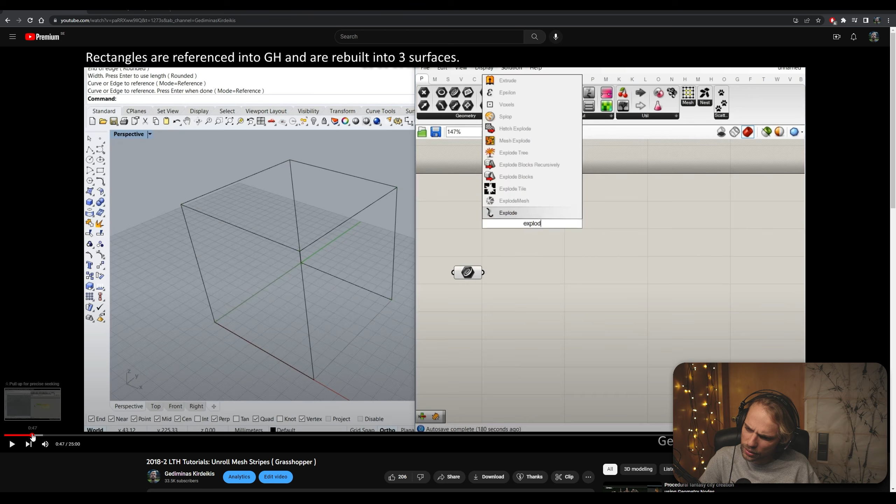Hello, and welcome to a renewal, or refurbishment, video of a tutorial that I made 4 years ago. Back then I made this Grasshopper tutorial, Unroll Mesh Stripes tutorial, where I went through the workflow of how you can turn any shape into a series of mesh stripes, and also how to make them laser cuttable.

This tutorial didn't have any sound, and at this point it's very old. So I want to give it a new life, because during the last 4 years new techniques have emerged and new ways of making these mesh stripes have been developed. So that's exactly what we're going to be doing.

Searching the internet, I found a forum thread where Daniel Piker, amongst other people, discussed how we can make mesh stripes a little bit more effective. Daniel introduced two approaches, and I'm going to be showcasing one of these approaches to you: the multi-pipe stripes approach.

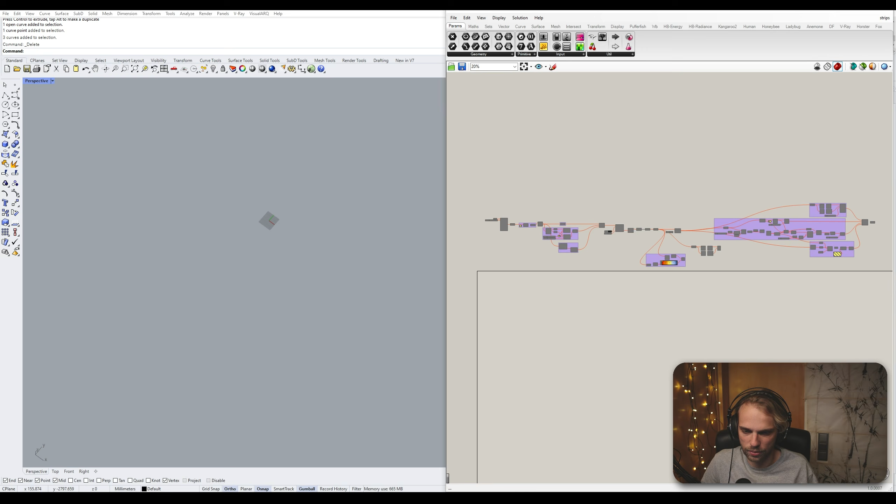This is what we're going to be doing. This is the cleanest approach that I've seen so far for this kind of stripe unfolding of any mesh, so I'm pretty happy with it. With that being said, we can jump right into Rhino and start working on this.

So this script that I have right here is just my notes, and basically I will just be looking at those notes if I get stuck.

First thing to do is to set up some sort of starting condition in our Rhino file. So I'm going to do something very simple: I'll just draw a single line segment that's 1,000 millimeters long, 1 meter, about 3 feet long, and then array polar it.

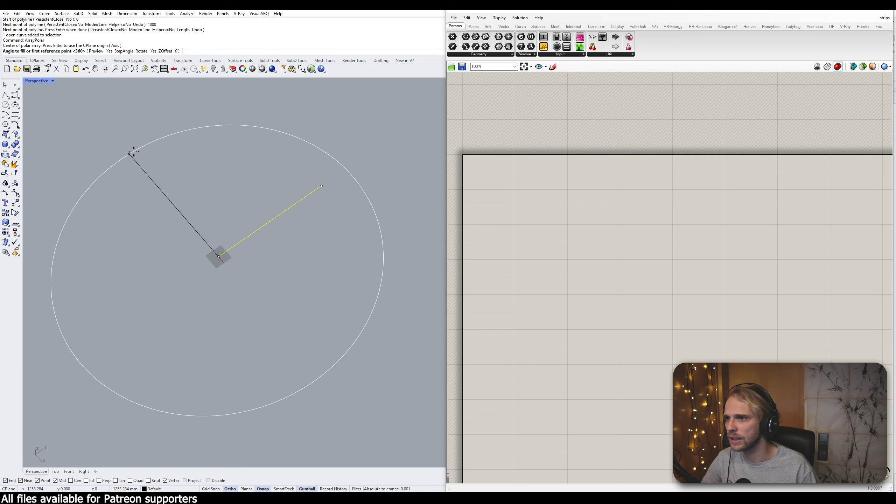I'll array it around the center point, this point right here. Number of items: 3, that's perfect. Angle to fill: 360 degrees, great. So we end up with these 3 lines here. For my kind of experiments, I think this is going to be good enough for now.

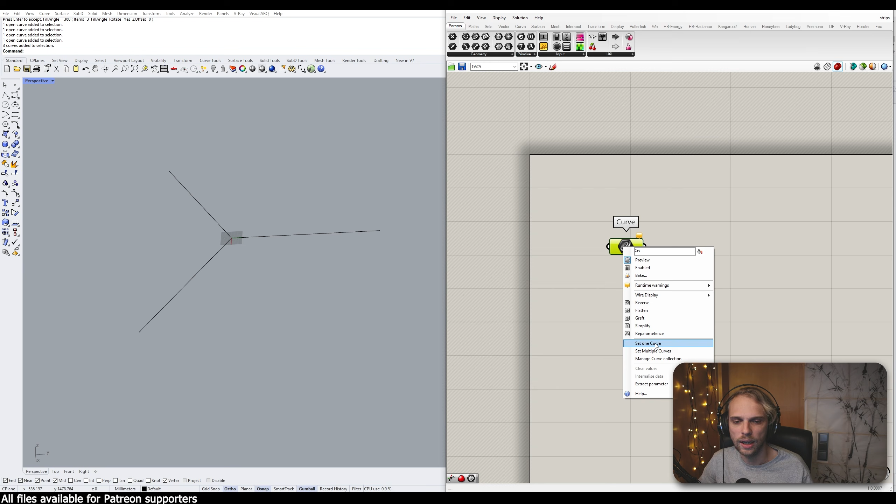Just having this, and then we can build up in complexity as we go. So I will reference these curves into Grasshopper, and let's do a quick bifocals thing—you don't need the bifocals, I do—just for me to show you the names of the components. Set multiple curves, we select all 3 of them, and now they are linked.

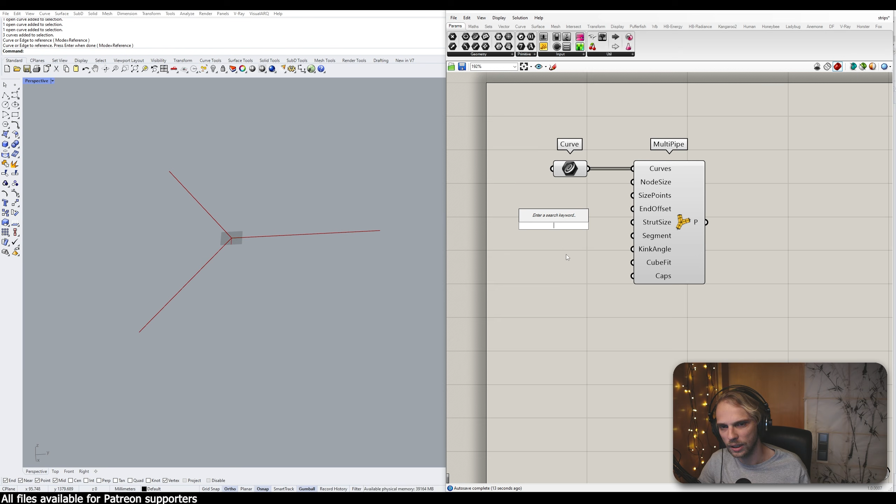Next step, we need to do a multi-pipe right here. The multi-pipe component will basically create sub-D pipes around the 3 lines that we have. Of course, we need to change the node size to something a little bit more reasonable. Let's go for, if this is a meter, 250 millimeters node size. Yeah, something like that seems fine.

And you can see how clean multi-pipe actually is. Honestly, I'm so impressed with how well multi-pipe works. With this done, we can extract a mesh from multi-pipe.

For that, I will go to Surface, Utilities—nope, Sub-D, Control Polygon, there we go. Select that, place it, extract. So it gives us... let's hide everything else here. It gives us a mesh representation of that sub-D cage that we created with multi-pipe.

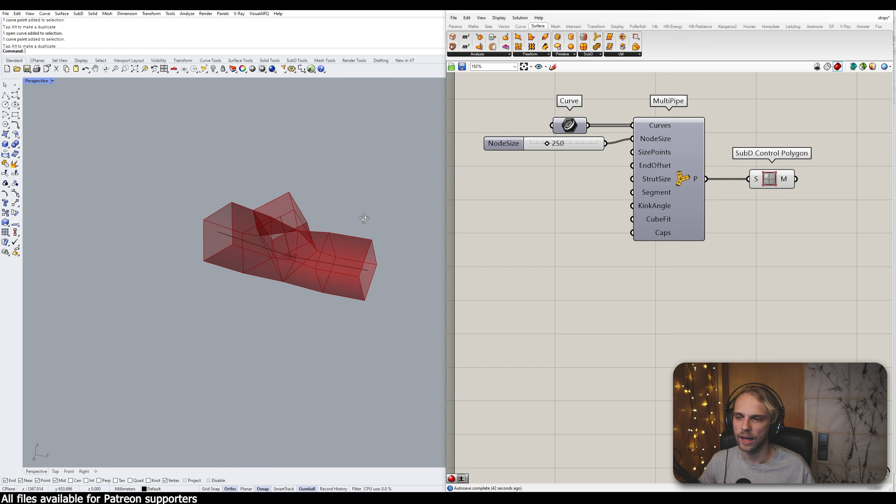Right, so we're kind of here. This mesh cage—if I were to take, let's say, one of the curves, one of the endpoints of the curves, and move it up, you can see that the mesh cage actually follows that and adjusts to it. I feel like this is quite interesting and quite important to see.

Okay, after this is done—so I've just lifted one point by some amount upwards—once this is done, we need to introduce more resolution to this. So we will use Refine, which divides each quad into 4 quads and each triangle into 4 triangles. Let's take a look.

That's still not enough polygons, so I'll refine it with level 2. To quickly get a panel saying 2, you can just write 2 and use a slider. Both are fine. So we connect it, and we have it refined.

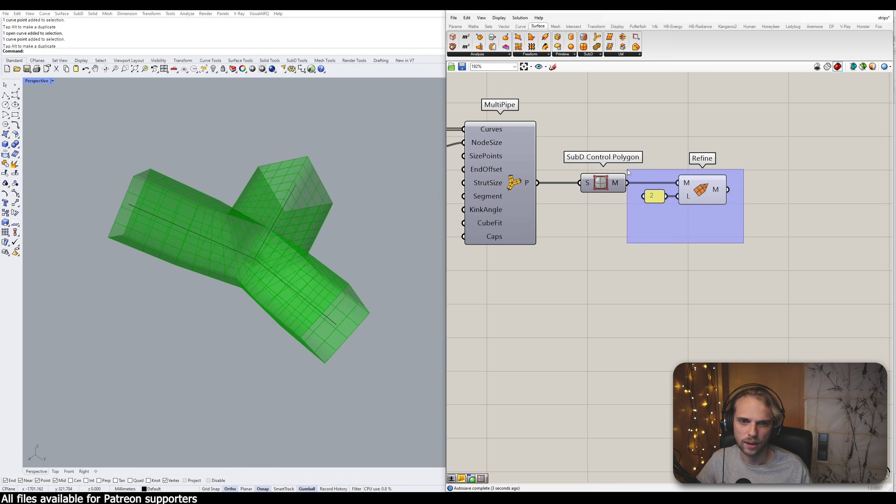We have it refined, and if I remember correctly, there was also cleanup. Just to be sure that everything is fine, that there are no double points or anything like that, I will use combine and clean component right here. So these two parts are basically introducing more resolution and cleaning up the resolution.

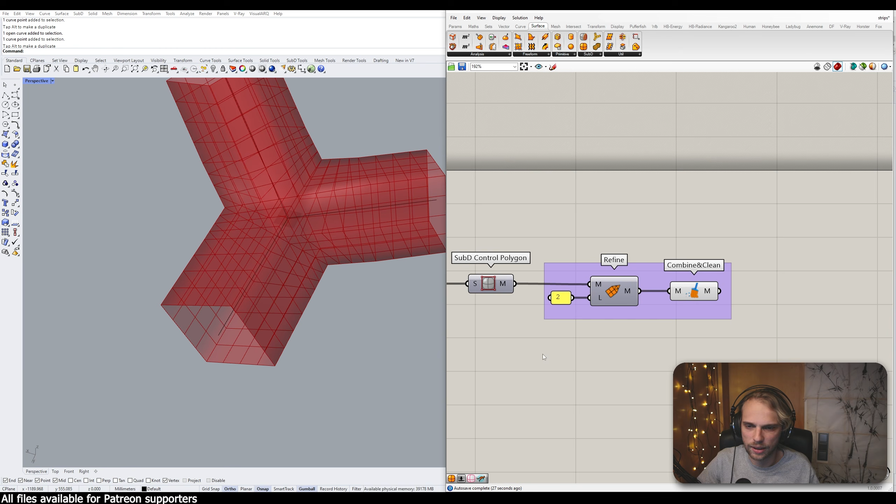Then what we will do is we will actually introduce even more. Now when I think about it, give me a second. Let's change things up. So what if we, instead of refining... I always do this and always regret it.

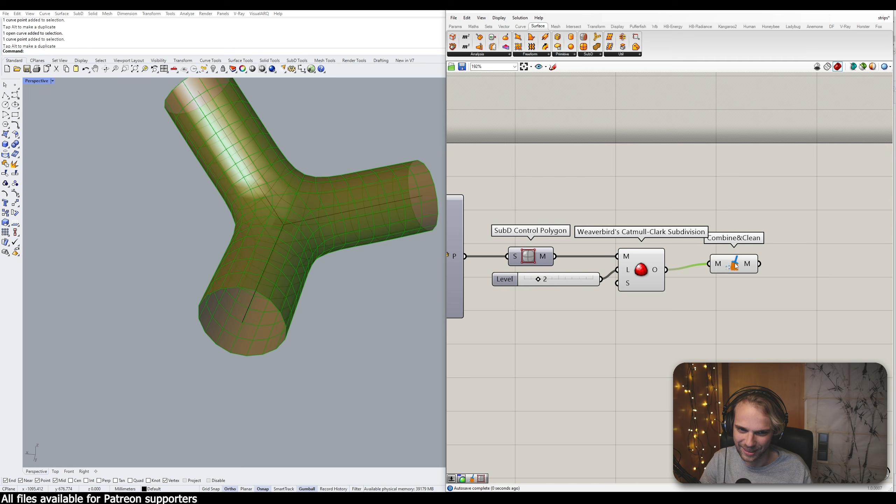Okay, instead of refining, we can use Catmull-Clark subdivision, with level 3, or sorry, level 2. Actually, let's do level 3, or let's do level 2. I keep changing my mind, I know, I'm sorry. Level 2, Catmull-Clark subdivision, and we use combine and clean. So instead of refine, we're using Catmull-Clark. And then we get a mesh out of this.

So mesh, like that. Let me make myself just slightly smaller so that I don't accidentally intersect with the nodes that I'm trying to display. So we have mesh. Next up, we will start building up this solver situation right here.

With kangaroo solver, I always like to basically just relax this mesh. With kangaroo solver, I always like to, what's the word, I always like to work backwards.

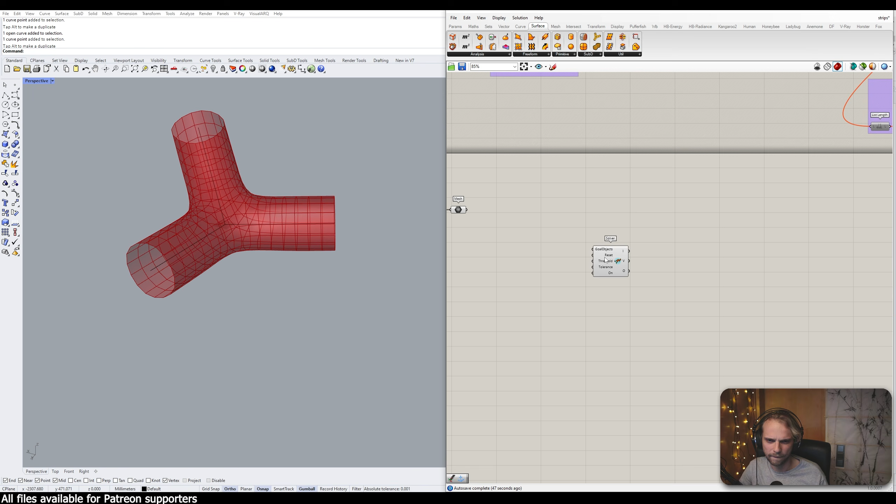So I'll use solver. And then solver requires goal objects, reset and on. Reset is a button, always, to be able to reset you need to press the button. On is a toggle, always. To have the simulation turned on, you need this to be double click, true. To have it turned off, false.

Goal objects, I always use entwine because it gives me the cleanest input. Stuff arrives in different data branches. Then after the entwine has done its thing, it's going to be spit out here also as a data tree. So we will want to separate out the data tree with a bang. Or you can use explode tree, it's the same thing.

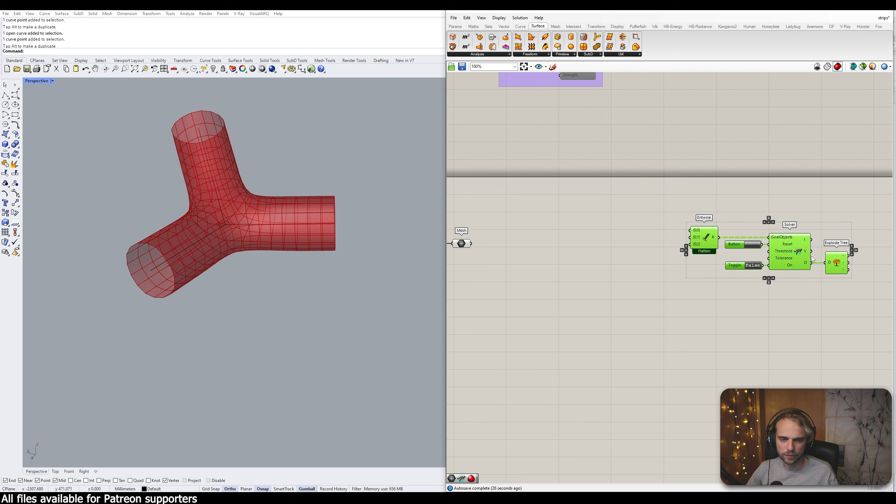Like that. Notice how I zoomed in and added one more input or output. So I zoom in and press the plus sign right here, and it gives me now 3 outputs. That's because entwine has 3 inputs. I need the inputs and outputs here to match up, or else explode tree is going to complain a little bit. Okay, so in terms of the goals that I want to have, there are 3.

Goal number 1 is show the geometry. This mesh needs to be shown, as easy as that. That's my goal number 1.

Goal number 2 is I want to introduce warp and weft, like this portion right here. I want to introduce contraction of edges, of mesh edges, along the warp direction, which is along, and weft direction, which is across. So warp, weft, like that. Mesh goes in here.

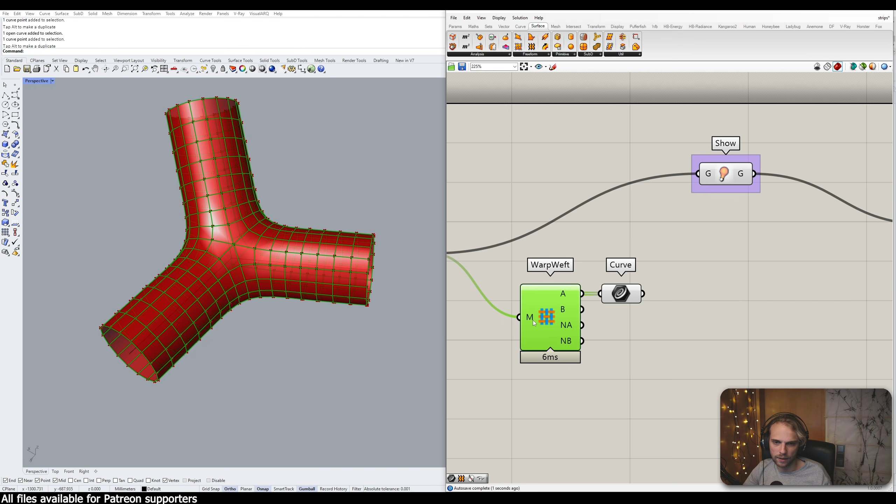And you can see 2 types of curves are being spit out. Let me show you those. Curve. You can see as I have them selected, this is all of the lines of the mesh in the warp direction and all of the lines of the mesh in weft direction. Does that make sense? There are 2 possible directions for the mesh. For a quad mesh, by the way, it needs to be quad to work.

All right, so with this done, then I will specify what's the new line length that I want for the curves in both directions. Line length, or length line, for A and also for B curves, like that. The length for both of them should be 0.

Great, but the strength should be different. So I want them to contract, but I want them to contract with different power or different strength. I don't remember how much, but let's just try. Let's just start with 0.5 for the warp and 0.25 for weft, and we will adjust accordingly.

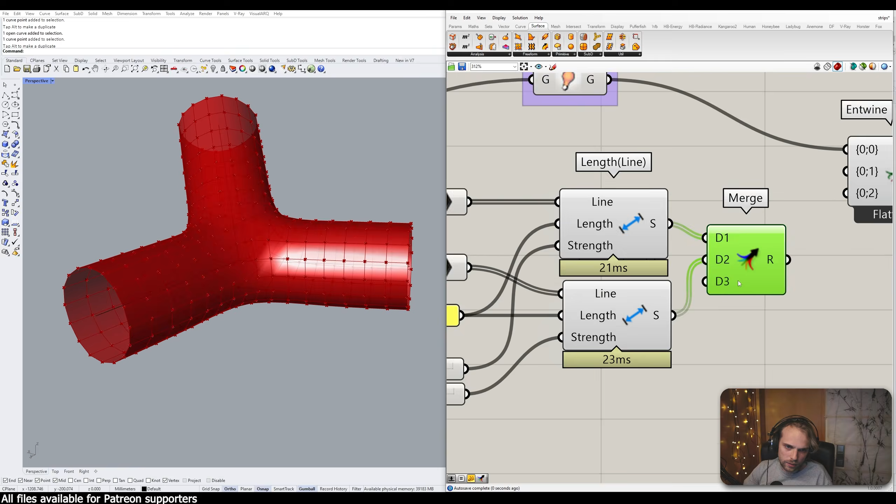So these 2 sliders will be a thing that we will keep an eye out for. We merge the 2 together. There we go, perfect. And we connect them to our Entwine 01 input. So this is our goal number 2, basically saying that some lines should be contracted. In one direction, lines should be contracted more heavily. In another direction, the lines should be contracted less heavily.

All right, let me hide that. Hide that.

What's next? We can also hide the mesh, right here, because it's being spit out here as well as here. There are many places where it's being output. Let's do this: explode tree 00 output, since show is our 00 input. This is where the mesh is being spit out, so let me create a mesh component and connect it like so.

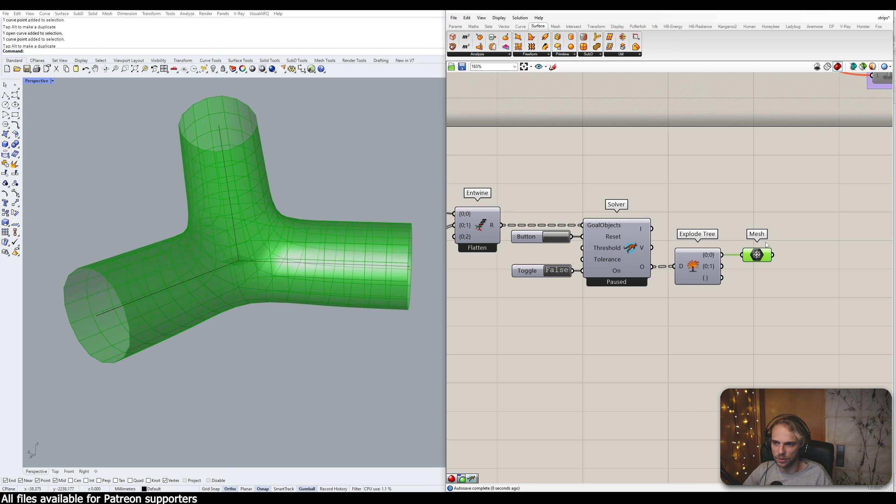Perfect. Now we can hide literally everything, and only the mesh component is going to be displayed. All right, last thing: right now, if I let everything contract, I can run this. You can see it just contracts to one point. Well, that ain't gonna do it.

So we need to lock it down. I'm going to lock down the mesh along its naked points, naked vertices, mesh - there we go. All of the naked points are here, and I'll just say anchor, anchor them in place. That is going to be our Entwine, the third Entwine input right here.

That's it, that's as easy as it is. All of the naked points are literally just the... I can show you, like that. They're around the openings, right? So they're right here. Okay, so we have ourselves a mesh.

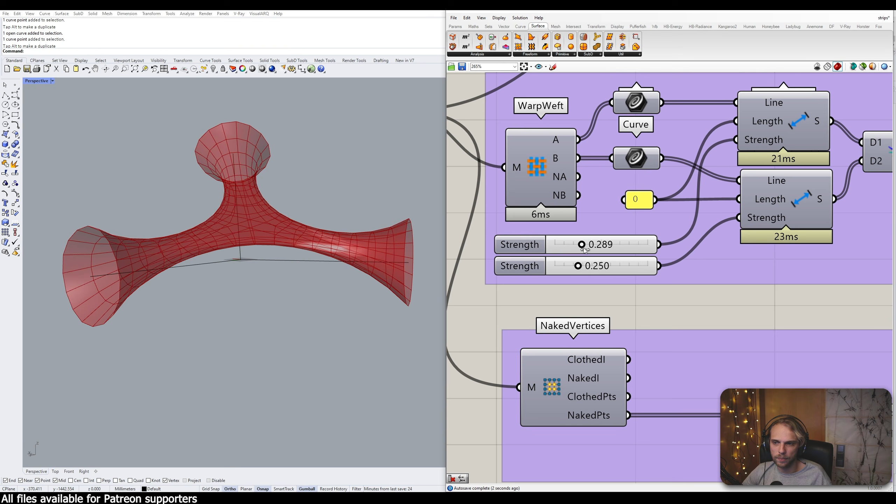Now if I reset and run this, you can see that this works exactly as what we would expect it to, how we would expect it to work. And now as I play around with warp and weft, I can fine tune this to give me a

pretty nice shape. After I'm happy with this, I will take a look and decide if I want this to be even denser in terms of the polygons. If I want to, I can do Catmull Clark again on the mesh, and it becomes even softer.

Keep in mind that this will simply increase the amount of polygons drastically, which in turn will increase the amount of connection points that you will have. So for now, I will not use the Catmull Clark on this. I will look at the mesh as it is, like a naked mesh.

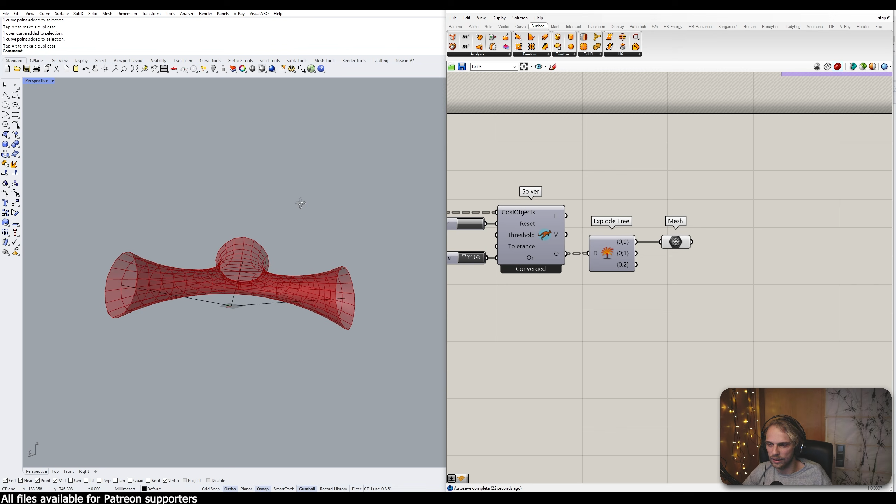Let's play around with the curves now. I feel like it's time. So I'm just going to create a curve right here. Let's see, this is a triangle, and then there is, come on, some sort of a line drawn.

Okay, my apologies, let's continue. I had to stop because I didn't want to continue with a form that we don't have full control over. And I figured out that, well, if the problem is how much it contracts or how little, then we do need to be able to control the length better, right?

So I have deleted that panel saying 0, and instead we're going to be using something a little bit more nuanced. I'm going to be using a multiplication rather, and I'll ask for, okay, what's the length of this curve, for instance, of each of these curves - what's the length? Okay, I get the length and I multiply it by 0.9, let's say.

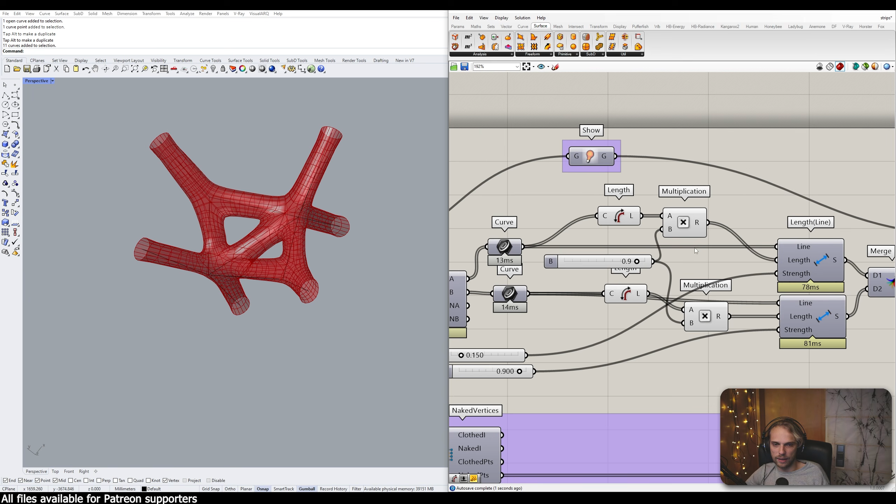And I can do exactly the same thing in the bottom here. So I'll just say length, multiplication, and I'll use the same slider for both. Like that - when I'm doing this, now I am able to fully control how much the form is expanding and contracting, which is great, right?

So now back in here, I can go back and change the node size to something a little bit thicker, a little bit bigger, perhaps something like that. Let's just see - and that seems about right. Okay.

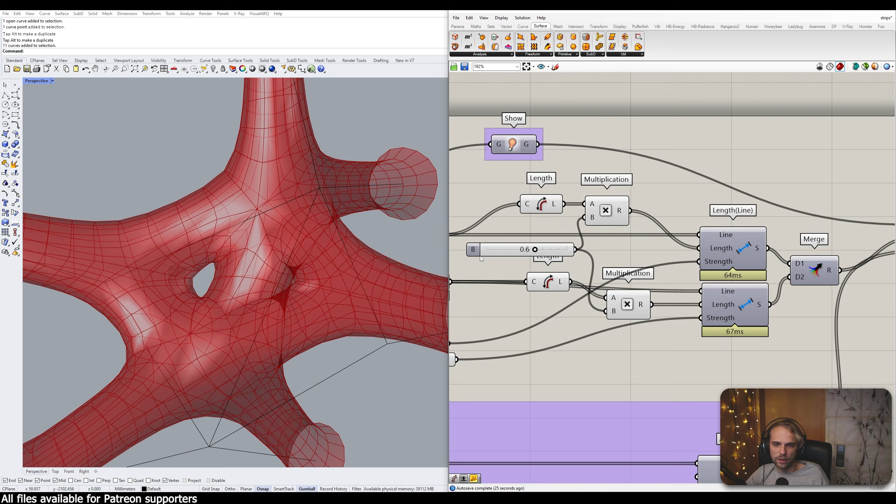And then if I reset, I get this kind of an output, and I can work on it with the slider. Right? So I can make it contract more or less, depends on what I'm trying to achieve. But let's stop it right here and let's just continue working on our definition.

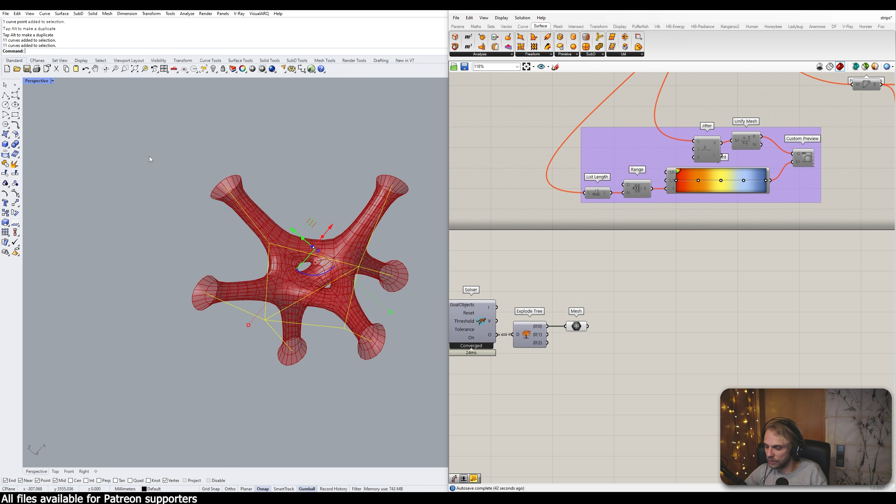So now with this done, or rather this done, as we move forward, we get ourselves a mesh. So this mesh right here, we're basically somewhere around here. And this mesh right here needs to be divided into stripes, and this is where our favorite little tool - let me hide the curves by the way.

This is where our favorite little tool called stripper comes in. So if I use a tool, stripper, and I just connect mesh to stripper, you can see that visually nothing really changes.

But then if I were to do this to it, color it basically, use custom preview with a gradient, and right click on the gradient to choose amongst presets a color range. Let's say this. Oop, messed it up, doesn't matter.

So color range. Then if I were to ask how many strips did it make, list item, basically, oh sorry, not list item, list length. Ask for list length, there we go.

And I say that, okay, my range is going to be between 0 and 1, and with list length, I will specify amount of steps in between 0 and 1 to kind of fetch the colors from here. So I'll use range for that, like so. Range connects to T. Now we have our colors.

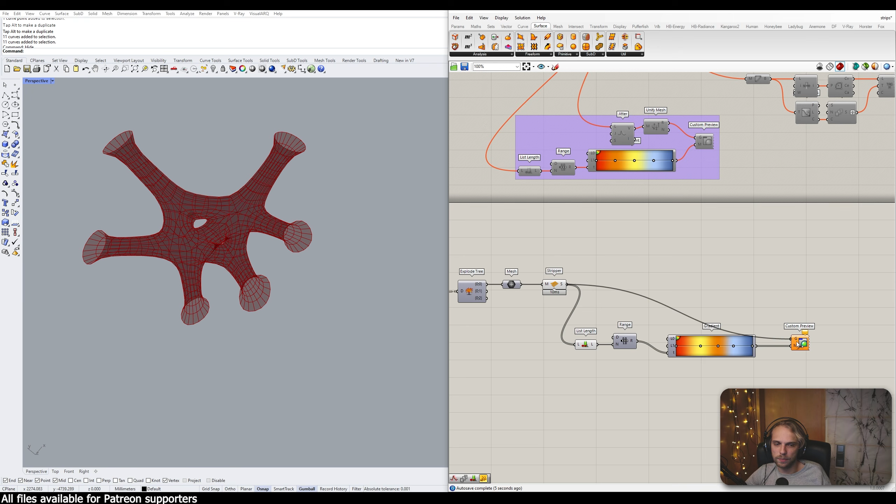And then in terms of the strips, if I were to color them just like so, you can see that it does color them, but it's all weird and it's all done in groups. And that's because of the notion of how stripper works. It produces, like it works in clusters, I guess. It works on the mesh in patches.

So we need to fix this. And the way you fix it is by using jitter. Basically, we just take every strip and we change its index number to something else. So jitter is like randomize or shuffle. Shuffle, I guess, is a good word.

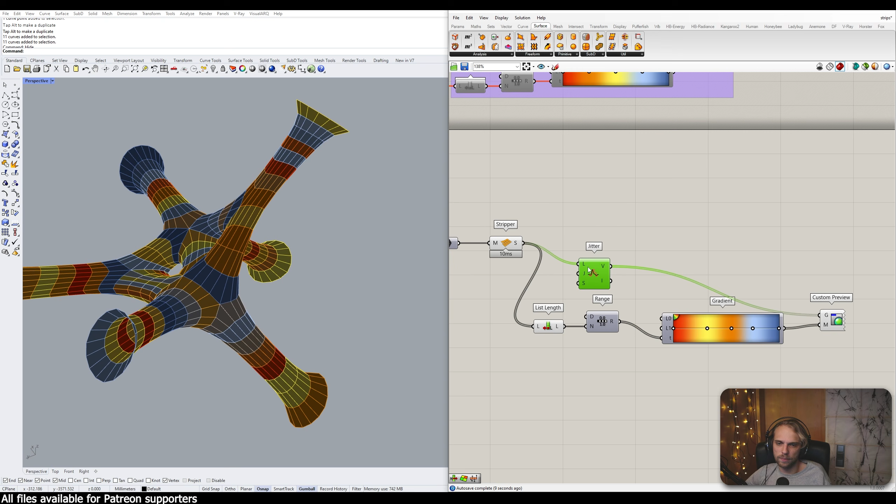Jitter, connect it again. Now you can see that the strips are indeed jittered, but the shading is all weird. And the shading is weird because the normals are messed up. So I can use unify mesh, like that. The result goes into the preview.

And now finally, if I hide everything, my preview shows the strips and shows them working. All right. So we have this.

What now? Actually, do I need the stick right there? Maybe I don't. Let's get rid of this, the line in between, this one right here. Let's just delete it.

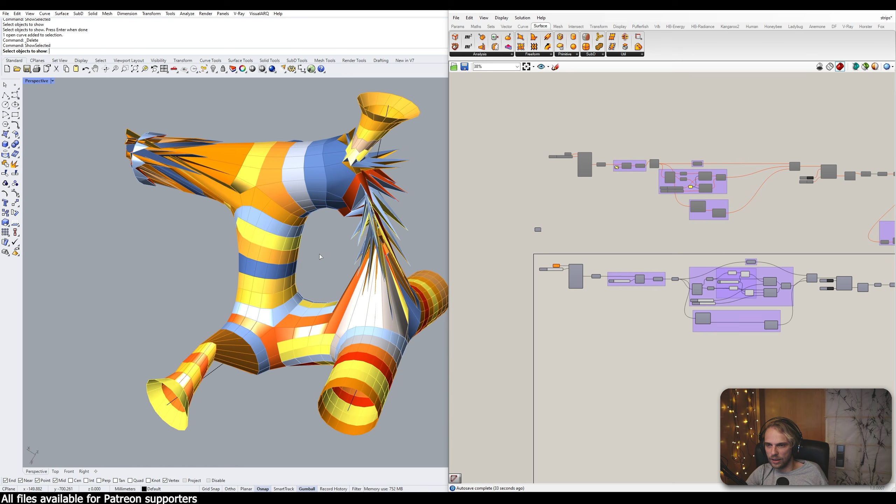And of course, everything is gonna show selected. Everything is gonna complain like crazy. But let me set multiple curves again, reset again. Yeah, now it's fine. Hide this.

Now you can see that the stripes are, first of all, messing up in certain cases. And the reason why they're messing up has actually been listed in the forum thread that I was talking about at the start of the video. Every single node where you have connections needs to have 3, 5, or 7 lines sticking out from it. If I believe, 4 lines messes it up. I might be wrong about this, don't quote me on that, but it seems to be the case here.

So if you want to have it even cleaner, make sure that, for instance, we could delete this and then it would be better, but I will not be doing that, at least not yet.

So with that being said, let's take a look at the alignment of the strips. Right now the strips are going in this way. I don't want that. I want them to go along the surface.

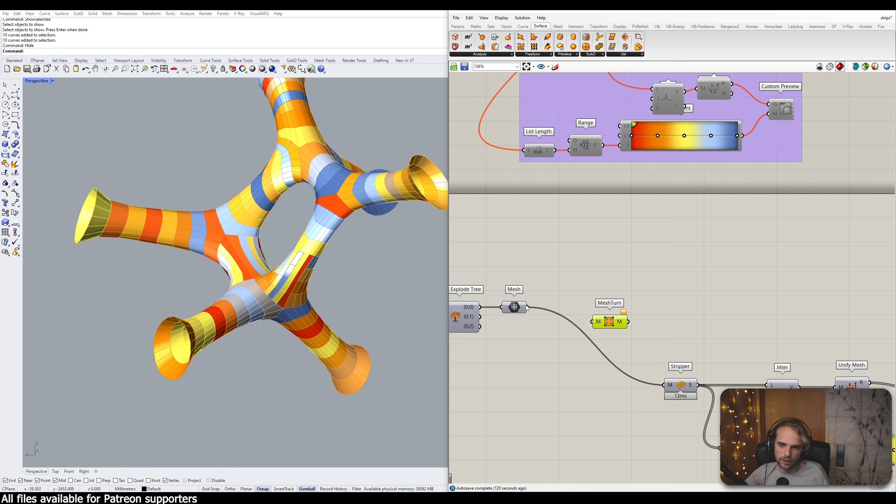So to make them go along the surface, a very nice tool is called mesh turn. Basically it just turns the order of vertices 90 degrees. So once you do that, then all of your strips align with the directions here, and you get pretty damn long ones. Some of them are pretty damn long. Right? So I end up with something like this.

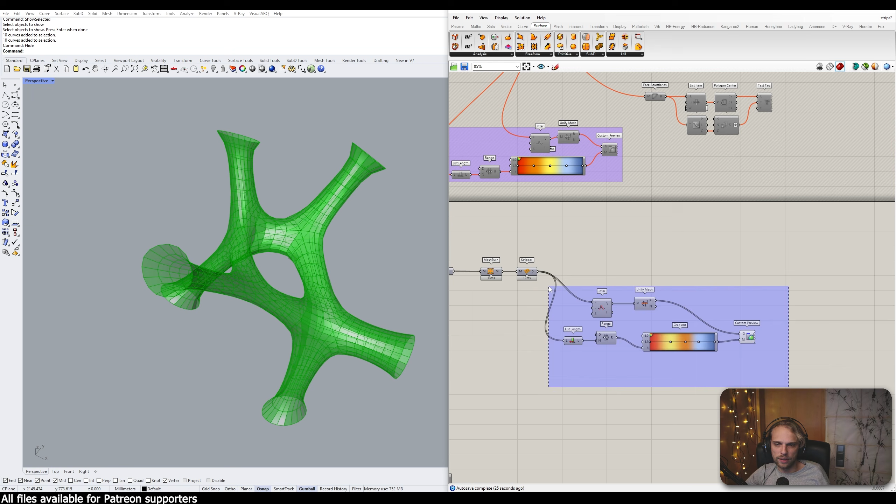Okay, after this is done, basically this is just going to be, or actually stripper goes here. This portion right here is just the preview portion. We will not be messing around with it. Now we are going to actually be talking about the, what's the word, the production of this thing. So creating a grasshopper definition that actually makes these strips possible to produce.

So let me create a data dam here between the mesh and mesh turn, so that every time when we want to update something, we do need to press the button, or else it's going to become too heavy for us. Now let's create, or let's unroll these strips and place them on the ground. So how do you do that? Well, there are multiple ways.

There is the unroll function in Grasshopper by itself, but a much better variation of it, I believe, is the Unroll Mesh Stripes tool found in the Fox plugin, which can be downloaded from food4rhino.com for free.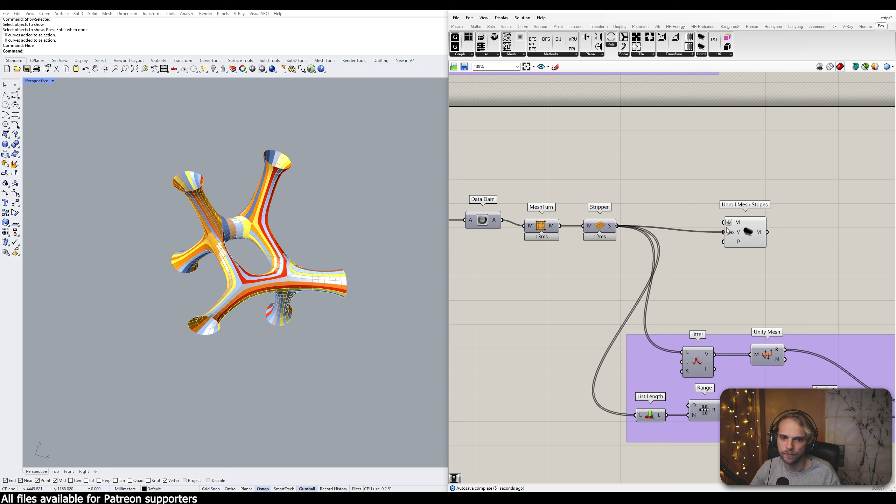Unroll Mesh Stripes asks you for a mesh, and unrolls the stripes. It asks us for the unfold value, where 1 means all of them are flat. That's perfect. It also asks if we'd like to pack them. Yes, we would, so we toggle the Boolean toggle to true. Now they're all placed on the ground, and they're all flat. Easy as that.

I believe I went overboard with the complexity of this shape, so I actually want to take a step back and delete half of it.

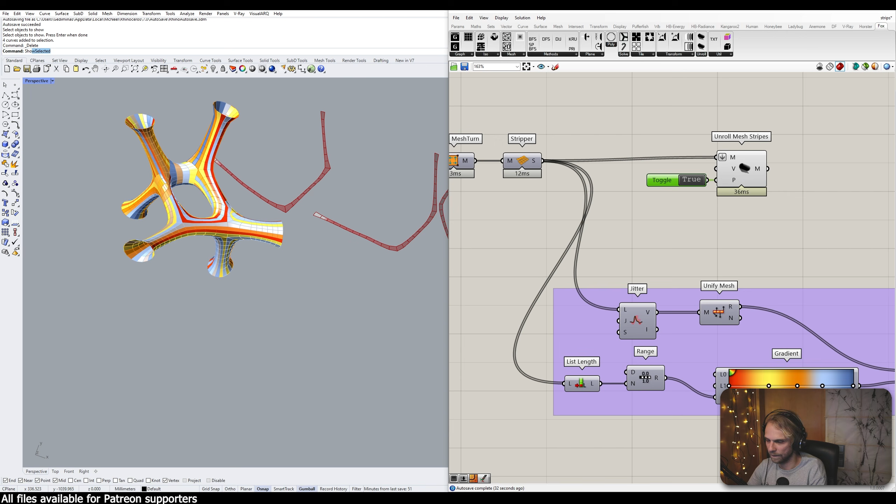Something like that. Because for a tutorial, we shouldn't use overly complicated shapes, so now I'm dealing with something like this. I think this is better. Let's press play and take a look at it. Yeah, seems to be a little bit better. We're going to stick with this.

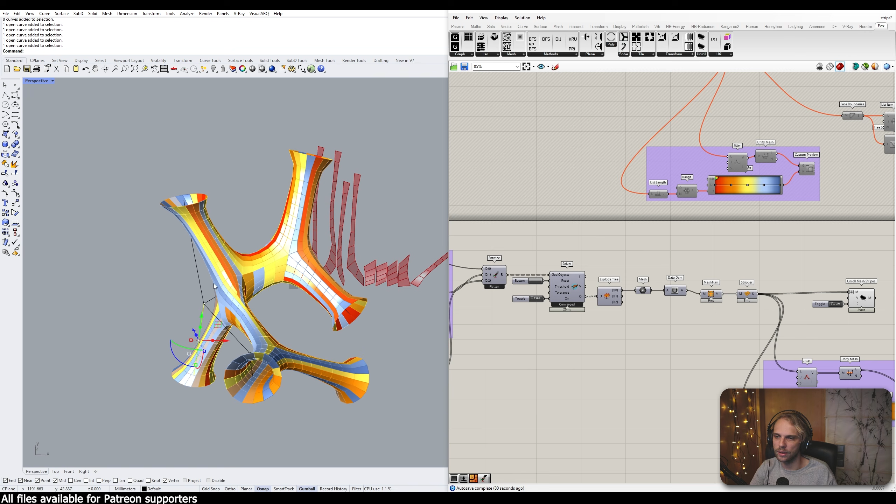Even here you can see that the strips aren't aligning properly, and that's because, for instance, here we have 1, 2, 3, 4 lines. So to make this work better, I would need to either add one more line or remove one. While here it's fine, we have a point connection with 2, that seems to be good - point connection with 2 and point connection with 4. So what happens if we add one more line?

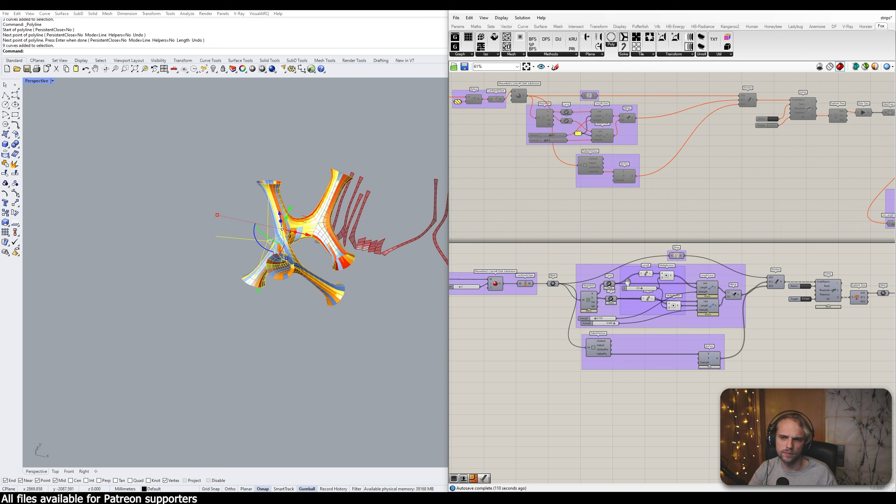At this point, I'm just investigating the tool. Reset - let's take a look at the mesh. That will not tell us anything, honestly. We do need to press the data dam. Now, since all of the points have an uneven amount of edges or lines coming out from them, the topology is clean, and you can see that the unrolled stripes are also very much clean.

So keep that in mind: from points, you want an uneven amount of edges sticking out.

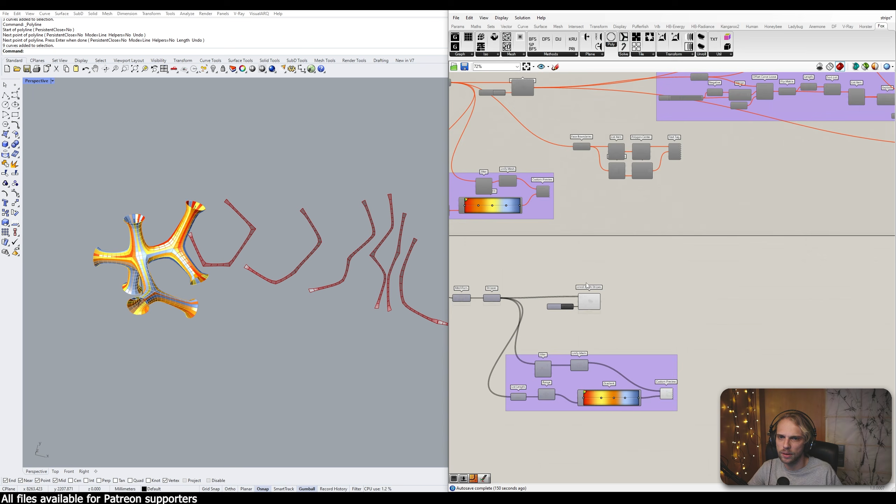Now with this done, we have our mesh, and this is where things get, well, not tricky, but very manual, because we need to make them laser cuttable. So we need to convert all of this into curves. The first thing we're going to do is extract a Weaverbird boundary.

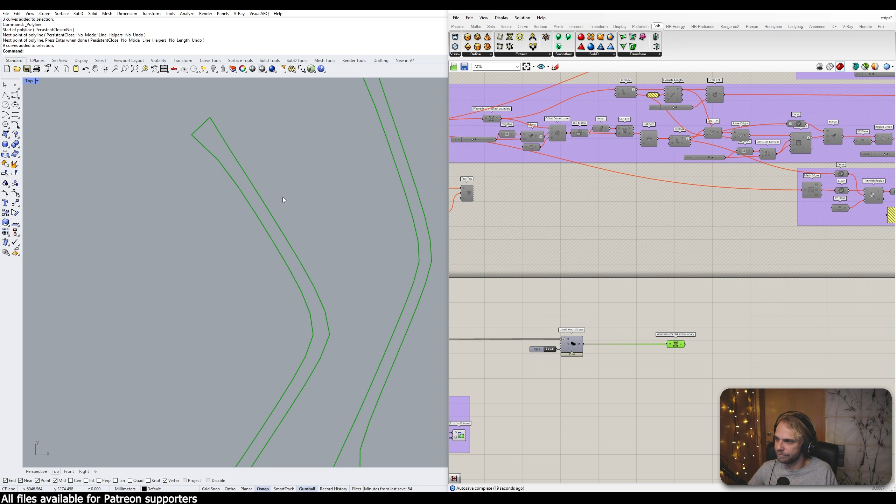Okay, fine. We go to the Weaverbird tab, extract naked boundary. There we go. We take that, hide the original mesh, and we have ourselves the outlines of each of these stripes. At this point I can be in the top view, and let's say this is going to be our go-to experimentation strip.

So when I've done this, I'm going to say that for every polygon we need a flap here with a hole to get a rivet through. So there needs to be a hole on the edge and a flap holding it, and since the polygons are touching perfectly edge to edge in the mesh, the holes are going to overlap, right? It just makes sense - it's a logical solution. So we're going to go for that, and the holes, of course, need to be right in the middle.

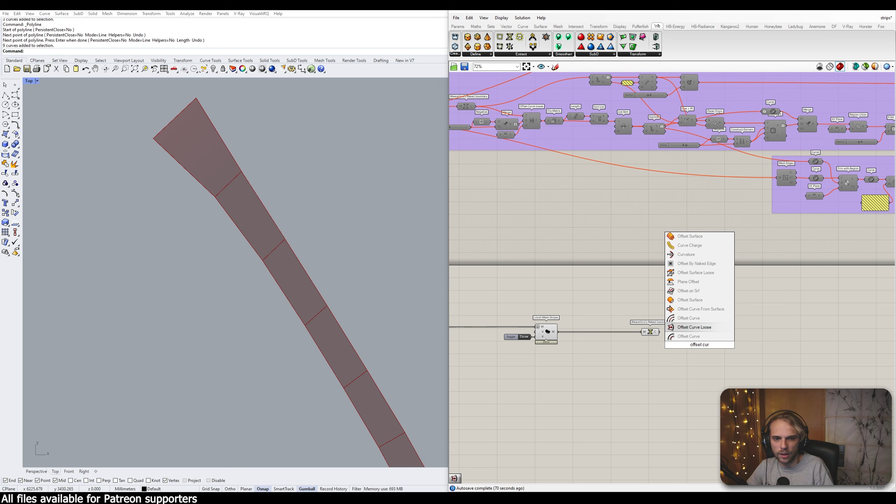So first of all, I will give it a little bit more breathing room by making the strips a little bit thinner. So offset curve loose - I'll use this, offset curve loose, and decide on by how much. Let's go for 2 millimeters for the distance, and you can see that it offsets inwards immediately by 2 millimeters. Let me make it bigger so you can see. We'll scroll it back down to 2 millimeters later.

So it's offset inwards, but I'm not sure that it will do this every time - sometimes it might offset inwards, sometimes outwards. So first thing, I'm going to create a plane, an XY plane, and connect it here to make sure that it always offsets in the world XY plane.

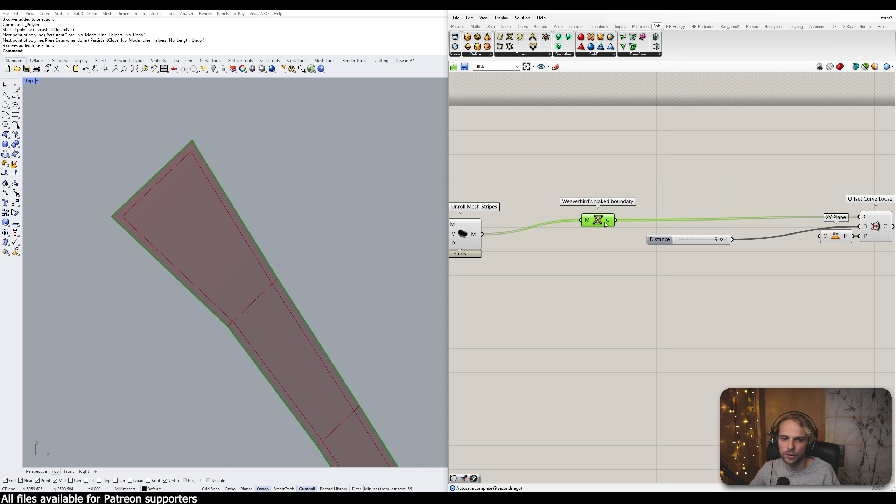Second thing, for the distance, I have this little trick I always do to make sure the offset is always inwards. If I have a distance and a negative of that distance, merge them into one list, and graft this list so that they come in as separate items, I then get a double-sided offset inwards and outwards for each curve. Once I've done that, I need to flip the matrix so that these two offsets are placed into the same branch.

Just cleaning up a little bit.

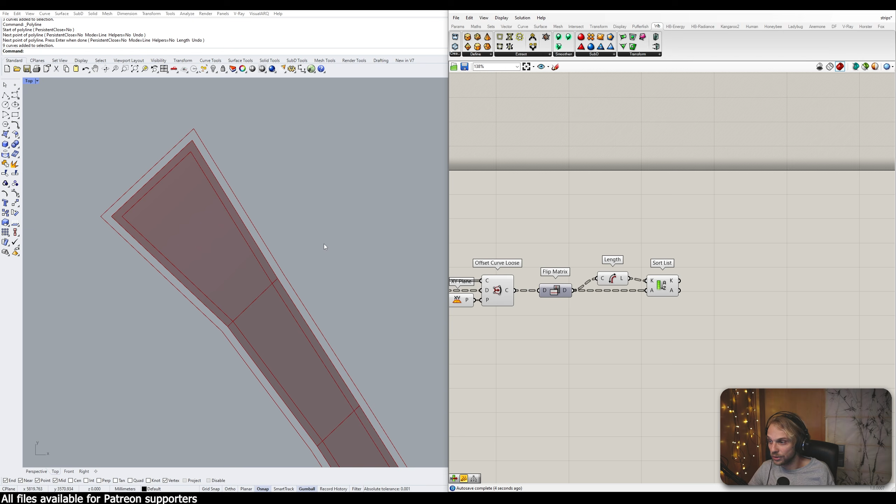Okay, fine. Flip matrix. And then I will simply measure the length of these curves. Measure the length, sort the length, sort the list, and sort the curves together with their lengths so that the shorter one is going to be at the top of the list.

Of course, the one that offsets inwards is going to be the shorter one. So with list item, I grab the shorter curve, and this curve is going to be the thin version, the smaller, inwards offset version of the two possible offsets, right? So this is a foolproof way of making sure that a closed region offset is definitely going inwards every single time, no matter what.

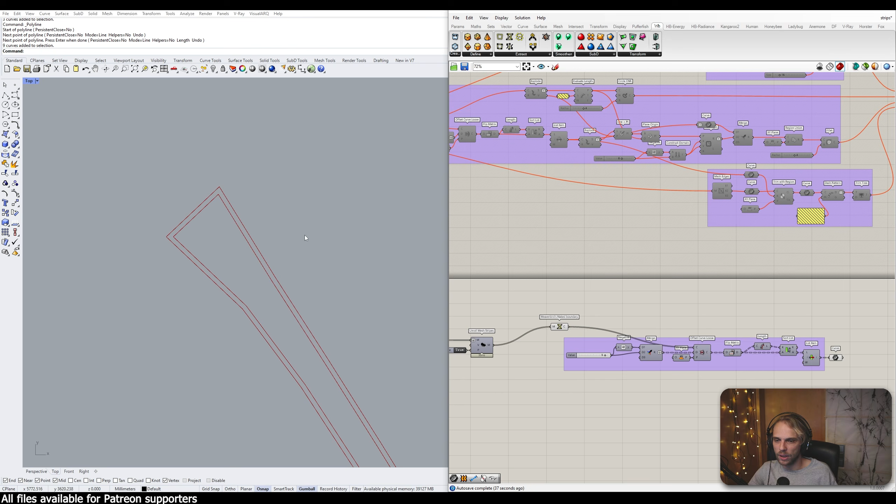Okay, so with that done, let's create a circle around every single edge right here. So let me show you: right here in the middle, a circle, right here in the middle, a circle, right here in the middle, a circle. Let's do that.

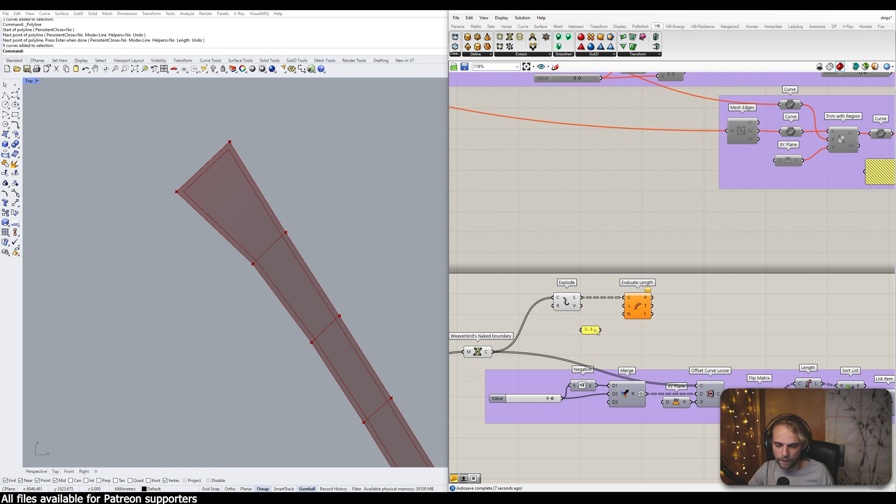I will be taking the naked boundary and exploding it so that I have my segments here. I will use evaluate length for the exploded segments, and for the length I will be using divide by 0.5, enter. That gives me a center point.

And on this center point, I will create a circle CNR, circle center normal radius. The center point is the evaluated point here. Normal is just Z, so I don't need to add anything. And for radius, well, I can define the radius. Let's see how 3 millimeters would look.

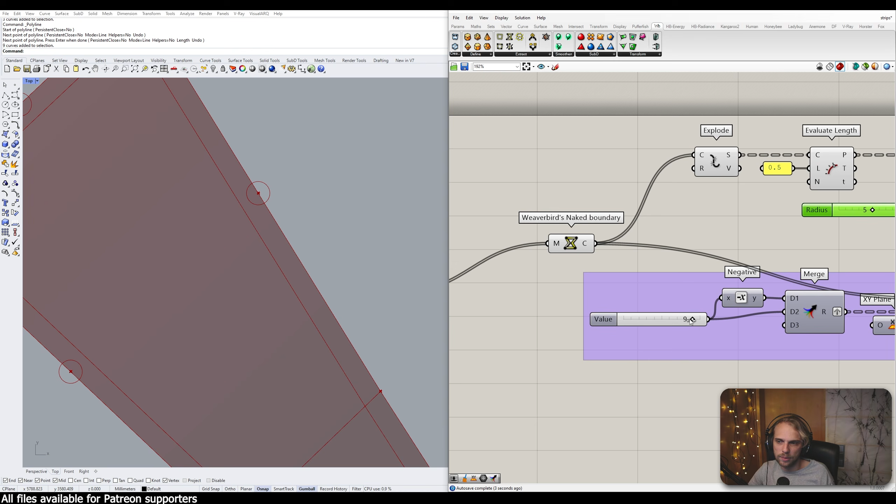Well, that's very small, let's do more. Oh yeah, I forgot that here we did 9 millimeters of an offset. Let's say it's 3 or 2 millimeters of an offset. And the radius, don't forget, it's not the diameter, it's the radius of the circle that is 4. So it's an 8 millimeter diameter for the circle for the rivets, which is way too much, but I am making a thing that's too big either way, so this is fine, right?

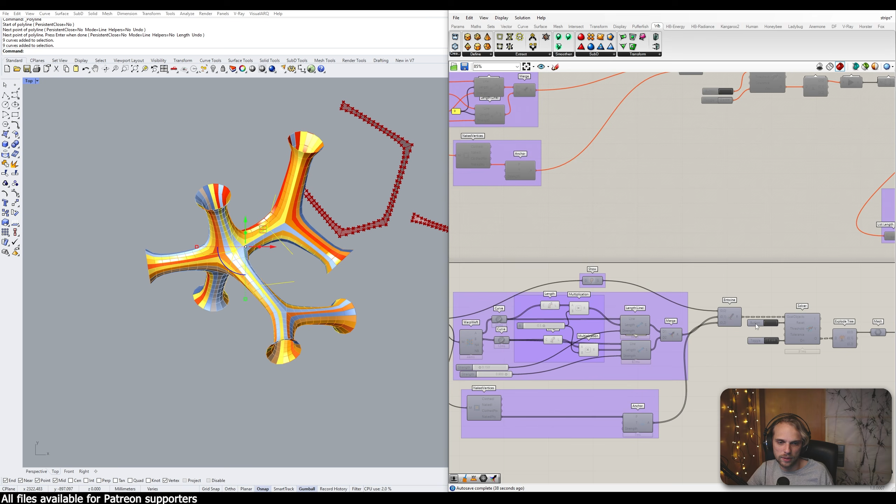Actually, it's so easy to fix that I should fix it. So I'll just take the whole thing and scale it by half. And here, of course, we need like 180 or something like that, to be scaled by half as well, the thickness I mean. Let's press play here. Now everything is a bit smaller, and the circles are a little more prominent. That's all I wanted to do.

Okay, back in here: radius 3 millimeters, offset 3 millimeters. We can do offset 2 millimeters and radius 4. Sure, why not, or 3.

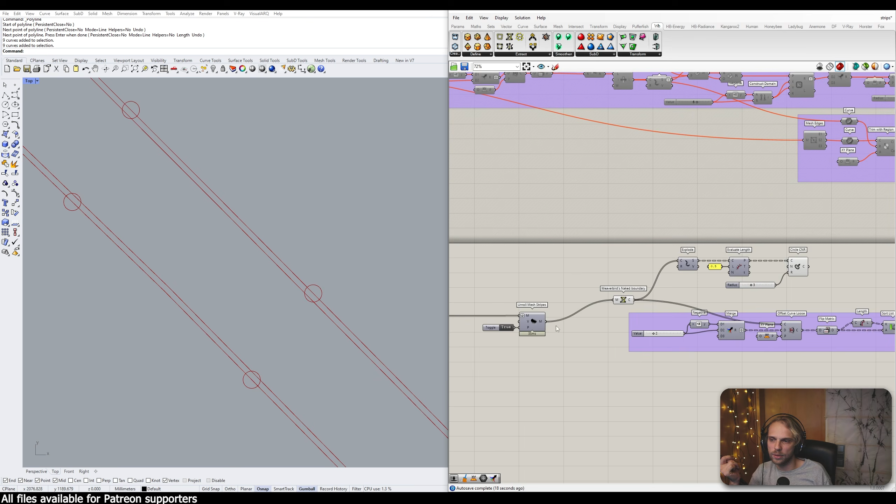With the circles done, these are going to be the holes through which a rivet will go through, right? And this inner offset is the actual boundary of the strips. Let me hide that. So this is the actual boundary of our strips, and we need flaps that would hold the rivets and the holes of the rivets.

So to create those flaps, all I need to do is just create a rectangle here, right? Let's actually look at those. I can do this by simply creating, let's move these out here because we're going to be working within somewhere here. So I will be creating, how do you call it, like a plane right on the exploded version of these curves.

So if I explode the offsetted curves right here, I get their segments, right? And I can use those segments together with the points that I have right here, the exploded points, I believe. Wait one second. Yes, yes, with the exploded points right here, I can create a plane that's called plane line point.

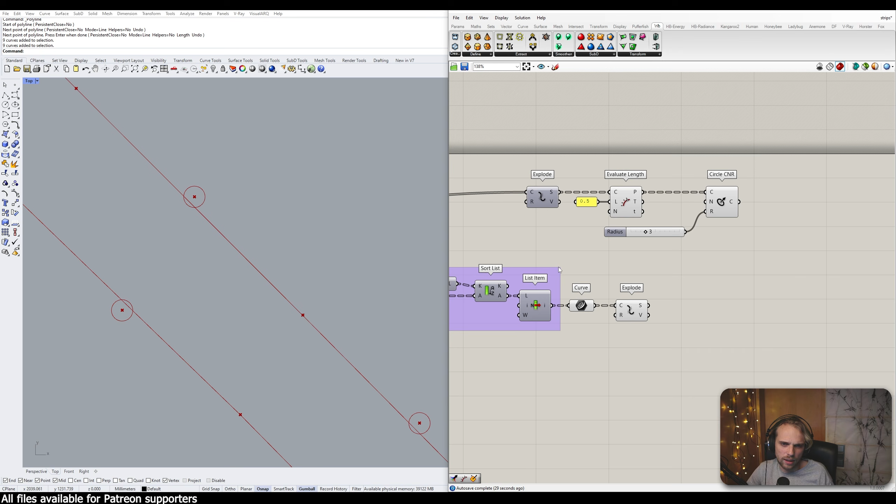As per usual, okay, let's go for sets, not sets, vector, plane, line point. There we go — create a plane from a line and a point. So the point is going to be our evaluate length points right here, the center points. Or sorry, no, that's a mistake, apologies — it's going to be our exploded points right here. And our line segments are actually going to be the line segments right here, these segments. And you can see a plane is created on these line segments on top of this point, matching this point with the y-axis and this line segment with the x-axis.

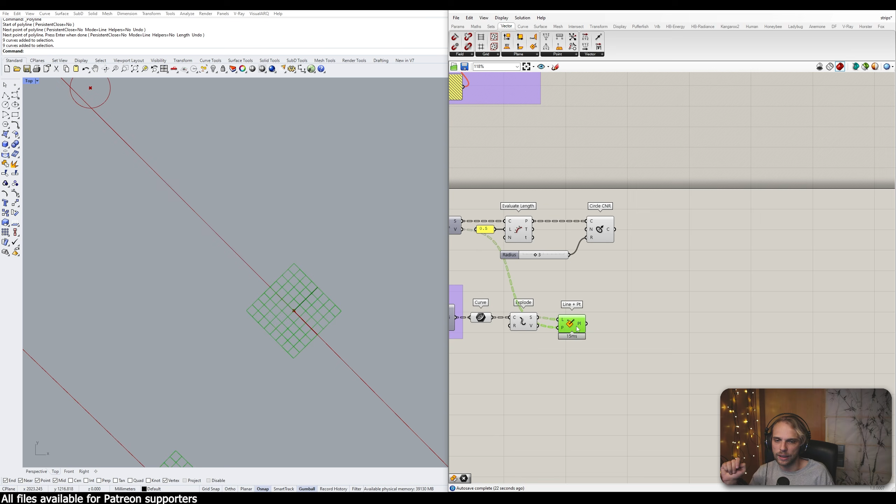All right, so with this being done, now I just need to take this plane and orient it from here to the center here, because we're going to be creating a rectangle for a flap. So I'll say origin, plane origin, this plane to the center point of the circle. I'm just using this point here as my origin, a new origin.

With that being done, now I have a plane in which I'm going to create a rectangle, and I'm going to say, okay, let's say my rectangle needs to be centered, and it needs to be 6 millimeters on both sides. For that, I need to create the construct domain, which feeds into X and Y.

Here I basically just need it to be from negative 6 millimeters until positive 6 millimeters. So 6, negative, goes into A, 6 goes into B, and that's it. We have ourselves a square that you can control the size of, and that is aligned perfectly with the plane. Easy peasy. Let's go for a 6 millimeter square on these planes.

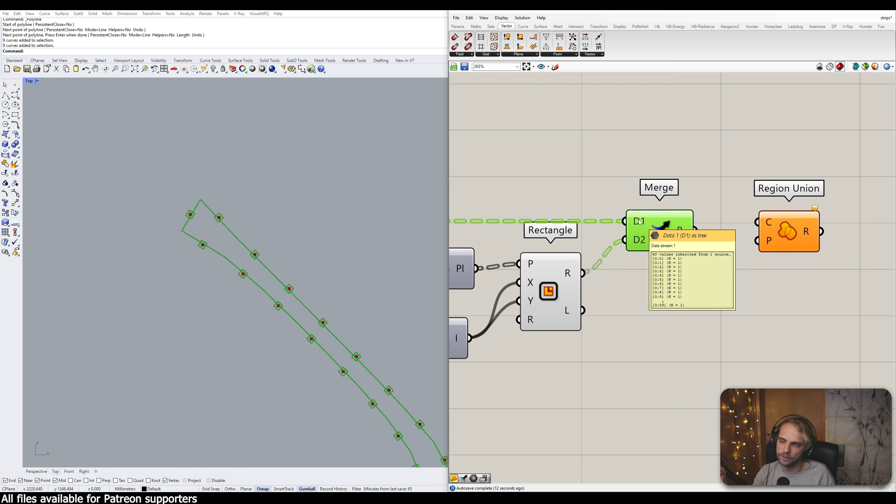The inner offsets, basically, those are going to be the curves together with the rectangles. And if I check the data tree right here, you can see that it's all a mess because addresses don't meet up. But I can easily fix this by right-clicking and choosing simplify for both inputs. Right-click, simplify, right-click, simplify. It gets rid of the trash from the addresses, and now they meet up.

And now if I connect them, this is complaining, but it's complaining because we didn't give it any planes to create the operation in. So I'm just giving XY plane, and now it's happy. And if I hide everything, I here have my circles, and here I have my little flaps.

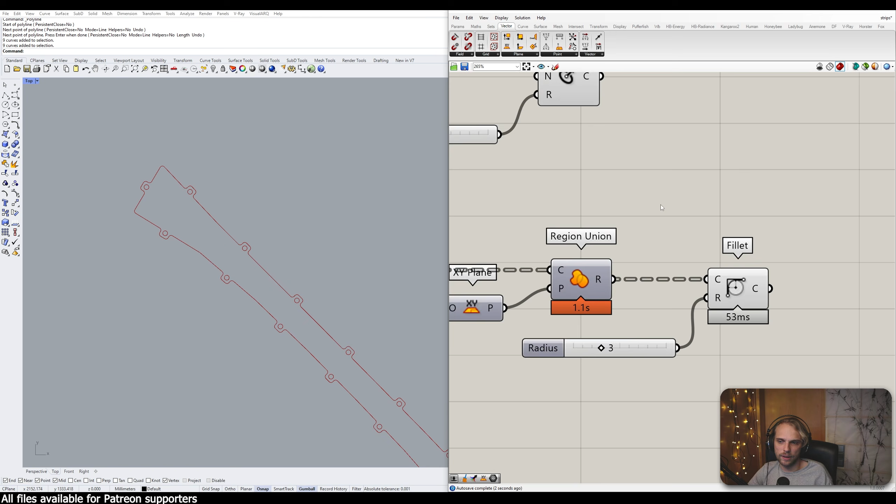Okay, let's make it nicer. Let's use fillet corners, fillet the sharp corners of a curve. That's perfect. And let's give it like 3 millimeter radius for a fillet. It's also good. There we go, we have ourselves some flaps.

Next up, this whole thing is going to be folding naturally, so we need to make some dashed lines for the folding. The way you do it is you just extract the mesh edges from here, from Unroll mesh stripes, mesh edges, and you only get the interior ones. So you only get the interior edges here, curve, like that.

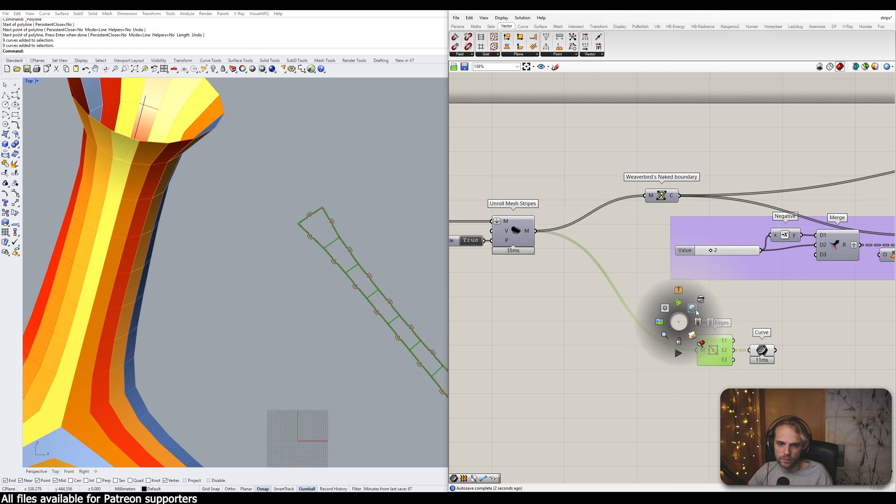So basically we have these. Then from the interior mesh edges, you can use these together with, or rather trim these away with the boundary here. So where's the boundary? The boundary is going to be this curve right here, the inner offset. That is going to be the one trimming off these little ears from these edges. So we will use trim, trim with region.

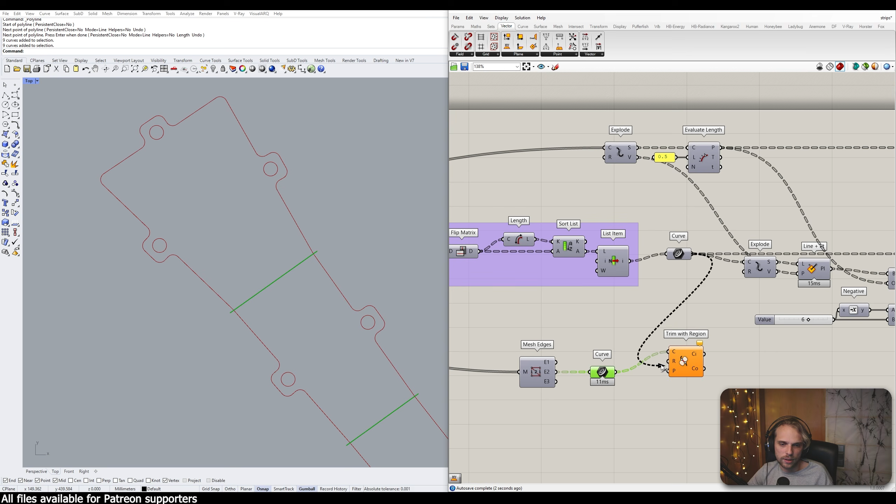There we go. The curves to trim are these, the region is this, and honestly I think the plane by default is XY. Never mind, we can use XY plane for trimming, and we get ourselves the output, curves inside and curves outside of the region. If I just type in curve component again, and take a look only at the component, you can see that now curves are trimmed.

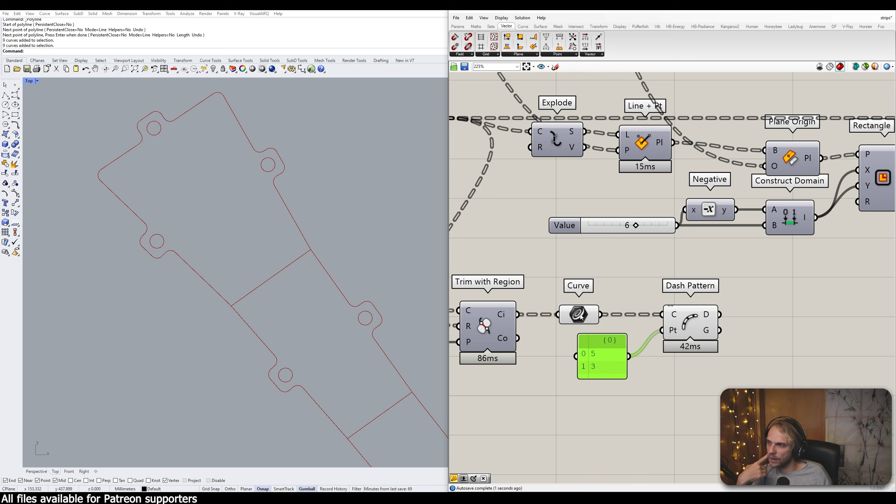And then I will just say dash pattern like that. And within the panel, I will write what's the pattern. So let's say 5 millimeters for the dash and 3 millimeters for the break in the dash. So 5, enter 3, and then click out. Right-click, multi-line data, make sure that there's 2 lines here. Connect, hide the curve, and congratulations, you have yourselves a dashed pattern.

It's a little bit on the aggressive side, so let's do 4 and 3, something like that. Yep, that's better.

Okay, so that's our dash pattern. Now I want all of this - that's one group, that's gonna be the second group, that's gonna be the third group. I want all of these to be within the same group, right? So once I bake this out, I want all of this to bake out in one big happy family, as a single group.

So I will use merge like that, and I'll connect all 3 of these - dash segments, dash segments, like that. So I connect them, and I just look at the output, and I can see that the output is just a complete disaster - addresses not matching, different lengths of addresses, and so on. So I need to fix this.

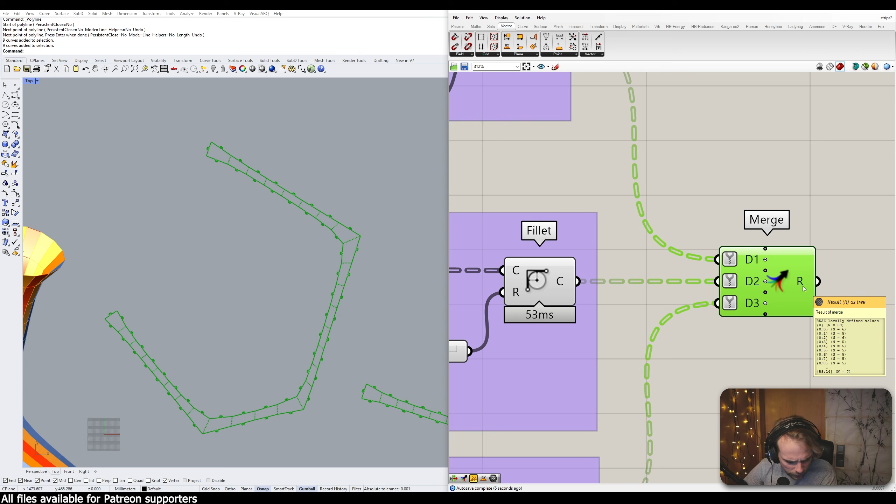Well, the first thing that I always try is just what happens if I simplify. Output, it's better, but it's still not good. And that is because the dash pattern, this output right here, it actually creates - let me simplify - it actually creates a double branching structure. So every branch has 2 branches sticking out from it, rather more than 2 branches sticking out of it. So we need to fix it.

We need to merge it back a little bit. So I'll use trim tree to basically get that all of the dashes that are within the same stripe, I will get them into one data branch. Trim tree will do that, because before all of them were in separate data branches on their own. So this was a data branch, this was a data branch, this was a data branch, and all of those branches were sticking out from a bigger one.

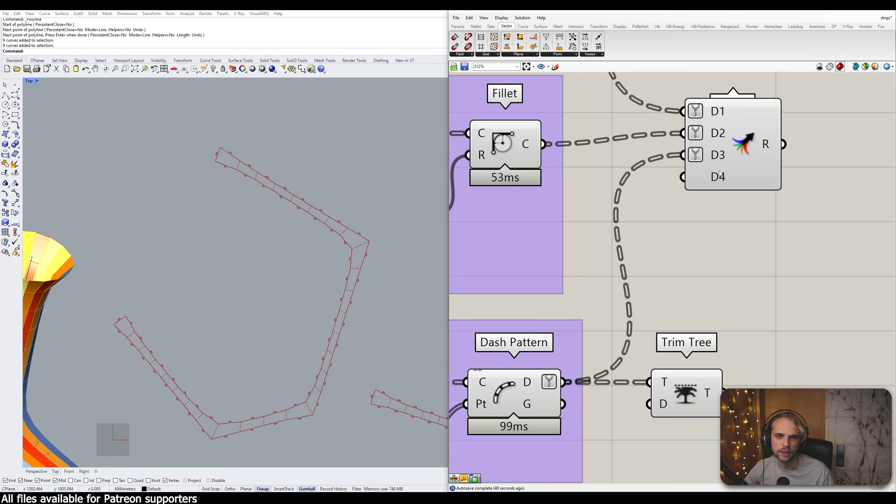So what I did was I just merged back the - well, what's the explanation here? Reduce the complexity of a tree by merging the outermost branches. That's all I can give you. So let me, oops, wrong one. Let me then connect the trim tree into D3, check the output, and now we can see that the data

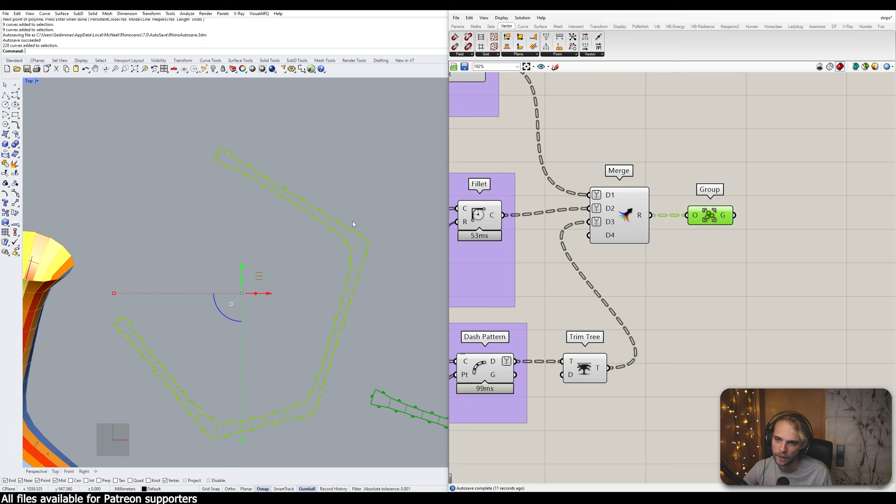output is actually clean. And I can use group to group the output. And if I were to just select group and hit insert on my keyboard - by the way, insert is quick bake on your keyboard - and I select this, I can see that the whole group gets selected. Neat, isn't it? Okay, so that is kind of done.

Now the final thing - how do you, when you're assembling this, kind of need to know what's where, right? Which stripe is which. Let's do a very quick example of this. For the stripper, sorry, for the stripper, we do face boundaries.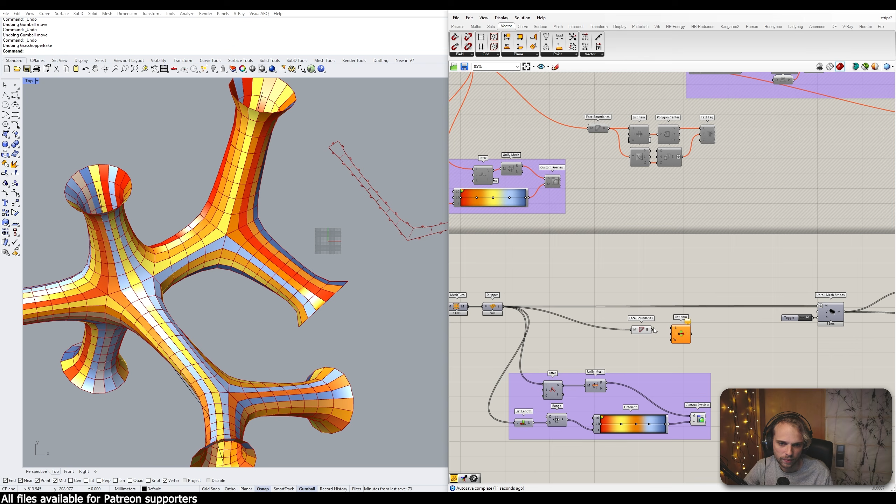We extract basically all of the polylines out of here, and I will just grab the first polyline within the list item. The first polyline for each stripe, I get it here, and I will ask, okay, what's your center point? Just give me the center area, not area - what was it - polygon centroid. Polygon center, there we go.

Let's create a text tag 3D, or text tag, not 3D, just text tag. CV output is our location, our text is actually going to be a series of numbers, starting from 0 and going up. And how much do we count? Well, that's as many of the face boundaries that we have - or not face boundaries, but rather as many as the stripes we have.

But with the face boundaries, it's enough to just calculate the tree statistics. Tree statistics, oops - tree statistics, there we go. It gives us the count, how many stripes do we have, that's 60. We connect that to the count of series. Now we are counting from 0 until 59, 60 times.

Then I right click the S and choose to graft, because this comes in grafted, right? So this needs to come in grafted. And now congratulations, we have numbering, which is very small. If you want it bigger, you can just right click on the tag and choose large numbers. So this is my stripe number 1, or sorry, stripe number 0, right? This one, which coincidentally is going to be this one.

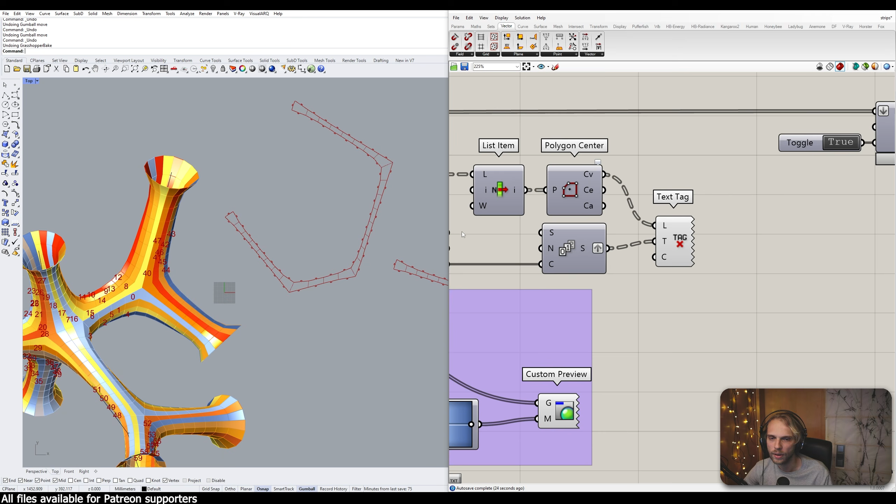So now I need numbering for these, and we will do a very similar thing to this. I will actually just let's group this, and let me just Control C this, Control V, drag it to - where do we drag it?

Where did I drag it? I dragged it to the top. Ah, we can drag it to the bottom, that's fine. Actually now we don't need this anymore, let me delete it because we have the one that I've done now.

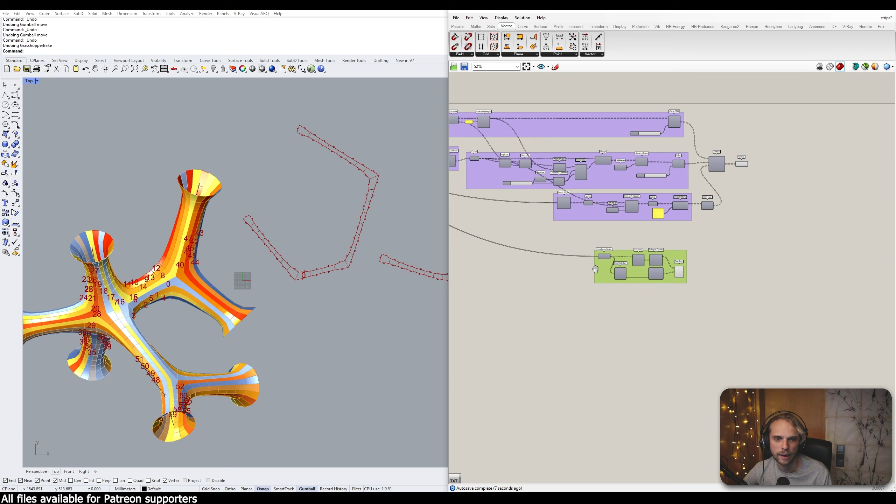So for face boundaries, I need to find the unfolded faces, which are literally the unrolled mesh stripes. I just drag out the long line, get it closer like that, it connects like that, and then drag it back to here. Delete the text tag, because here the text on these does need to be laser cuttable.

So again, we're back to the Fox plugin, where we have the Utilities Text, pretty decent. There's also Bowerbird which has a text node, and there's many plugins, but since we're using Fox, we're just going to keep using the tools from it.

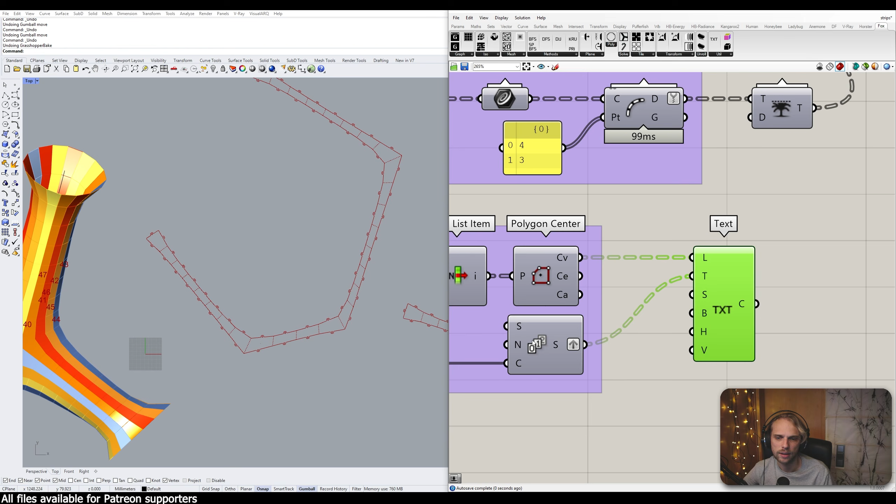Location, again center point. Text, again the series. The size of the text, well right now I don't even know where it is, so I guess it's too small. Let's go for 20 centimeters. I'd say that's a little bit on the big side. Let's go for 2 centimeters, so 20 millimeters. Like that, that seems good.

Let's make sure that the text, especially once we're within the teens, doesn't stick out. That's a little bit on the close side. Okay, smaller. Let's go for 13, lucky number 13. Yeah, I think that's going to be fine.

So that's our text. That of course will also be, well, let's simplify it just to check. Yeah, that's going to be fine. It just connects to D4, gets simplified again, just because I want to keep the simplification here consistent visually. And that's it, that's our groups.

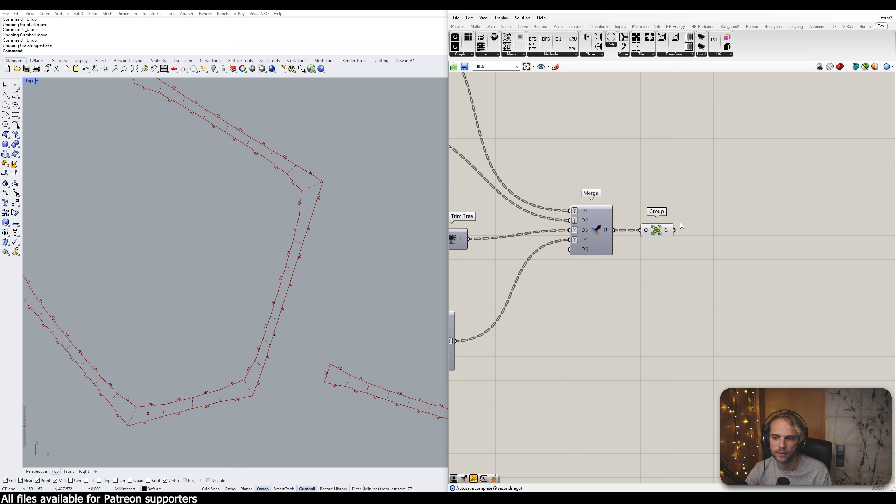Now if I insert them and just drag them out here, here's my strip number 1 that can be laser cut and assembled together with strip number 0, and you can use the 3D model to check what's where. So 1 and 0 connect like so, and you just align them end to end and they will connect nicely.

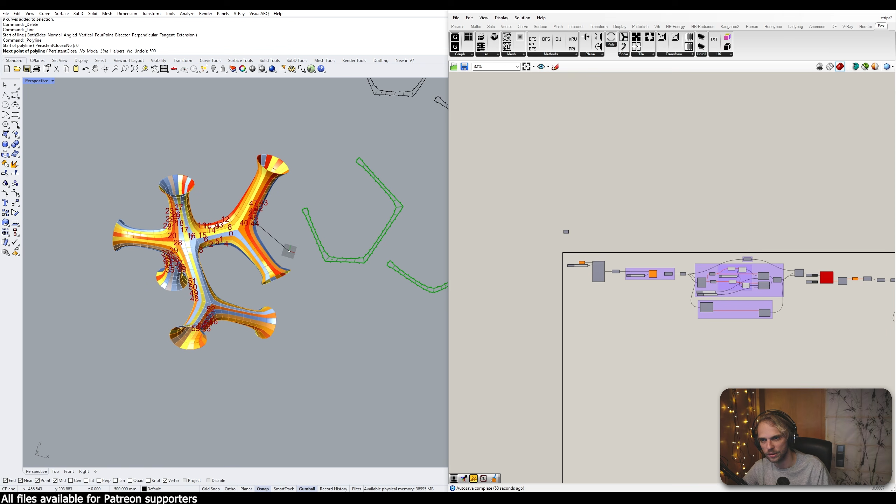That is honestly it. Now if I were to say, well, I don't want this, I want to do something much more simple, I've just deleted the lines. Let's say my one line here, another one here, something very very simple. One, two, three.

Actually I'm interested, would this work? Because technically all of these are 3 lines. I don't see why this wouldn't work. Ah yes, the inner one is freaking out. And also I forgot to delete the bake.

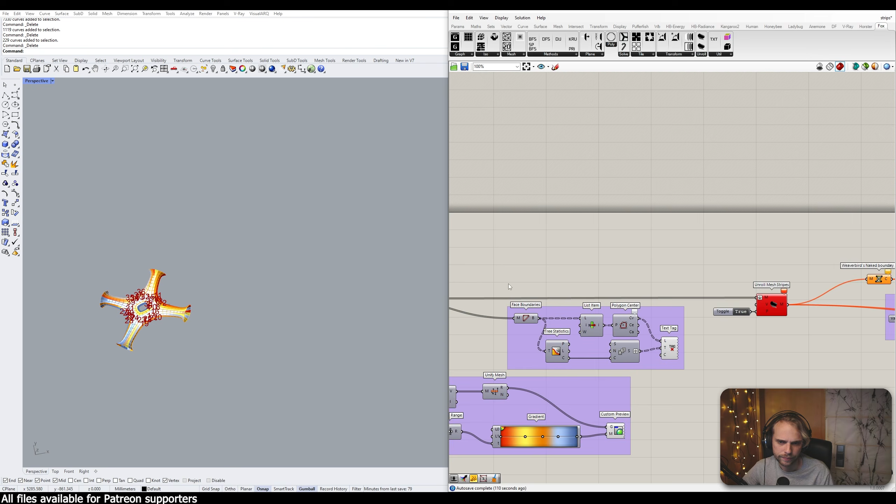That's interesting. Shall I investigate? Give me a second.

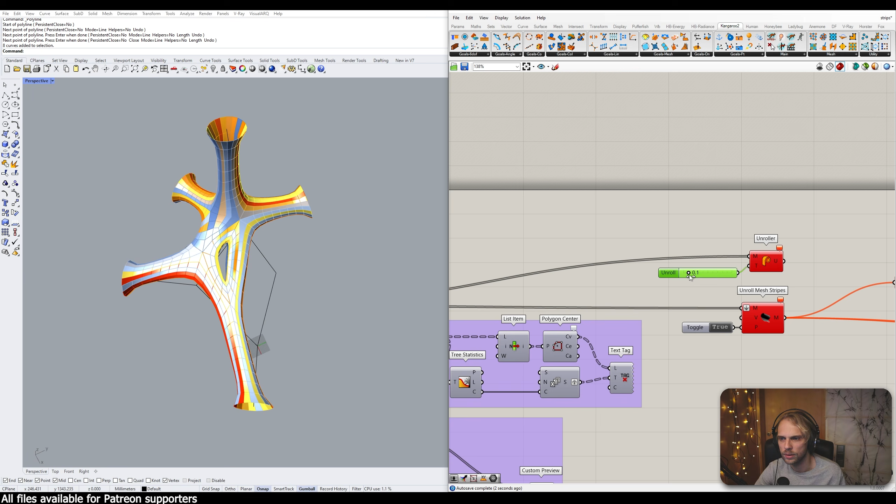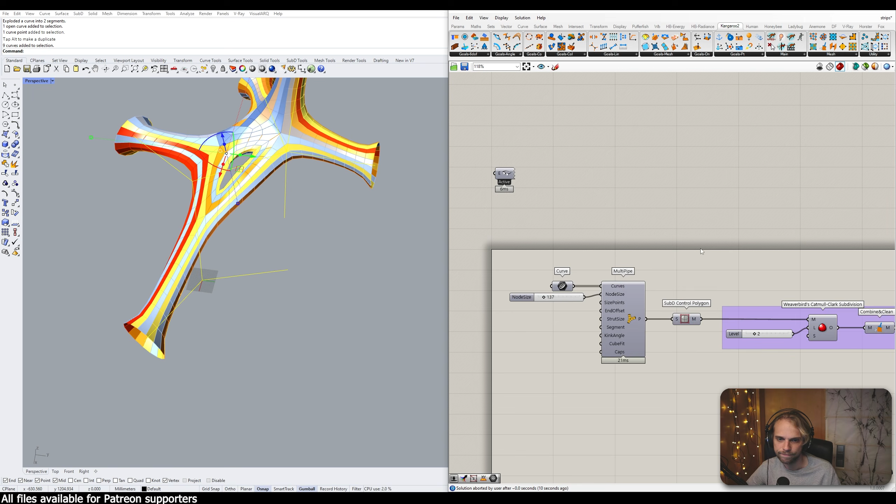So I will simply explode this, take this and drag it out right here, set multiple, play, and you can see now everything, both of these are working as expected, because there are no enclosed loops.

So if you're curious to see how you can actually separate out these polygon loops, leave a comment and I will make sure to show you another follow-up tutorial on this, because this one is getting a little bit too long and I don't want it to be like 5 hours long. So we're going to be ending here.